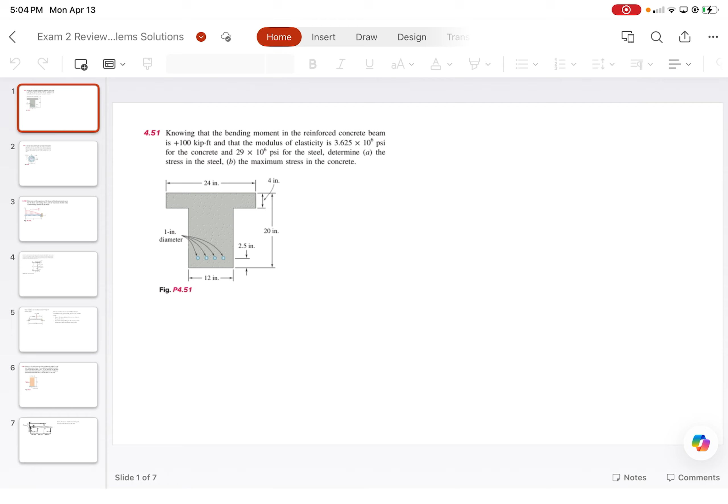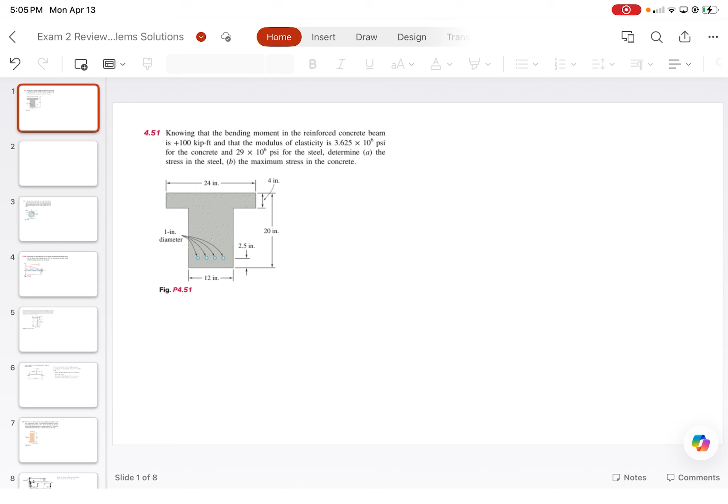All right, so we'll go ahead and jump straight into this problem here, suggested by Travis. We're given that the bending moment in the reinforced concrete beam is 100 kip-feet, and the modulus of elasticity for concrete is around 3,625 KSI and 29,000 KSI for steel. We're asked to determine the stress in the steel and the maximum stress in the concrete.

Let me increase the text here a little bit. I'll give you guys a second to write out this problem. This is basically textbook problem 451 in your Beer textbooks. Not all of the problems in this PowerPoint are from your textbook, I find some of them online from other textbooks, or take them from the COT class, for example, and we're just modifying them.

One thing you'll notice about this concrete problem, unlike every other problem we've covered so far for concrete, is what? It's got the little T shape on the top.

So whenever you see anything like this, there are two possibilities for where the neutral axis can occur: either within the flange, or directly in the web. Because of that, you usually assume first that the neutral axis is located in the flange. We do all of our calculations assuming our depth to neutral axis is C, making the assumption that everything is within that dashed line above first.

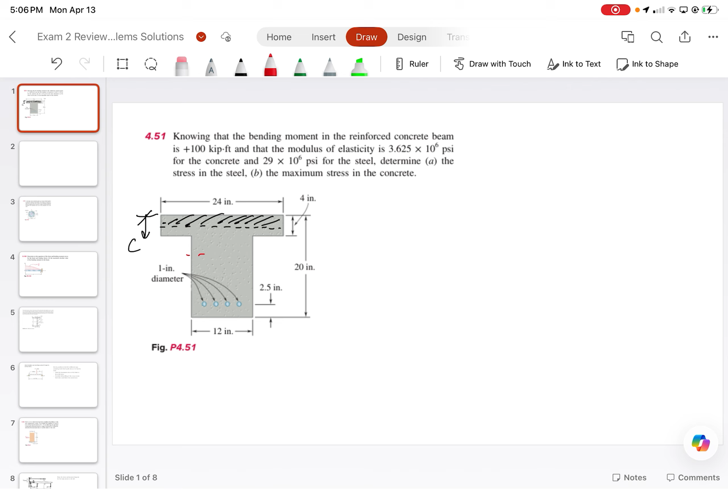If we find that the depth to neutral axis C is within that flange, great, that's our section. But if we get that C is greater than 4 inches, then technically finding C down here is not exactly correct, but it does indicate that it goes below the flange.

Because of that, you need an entirely additional section dedicated to the full flange, and then your C would really be solved from the bottom of that flange, since we know the bottom of the flange is at a fixed point 4 inches below. Does that make sense to everyone?

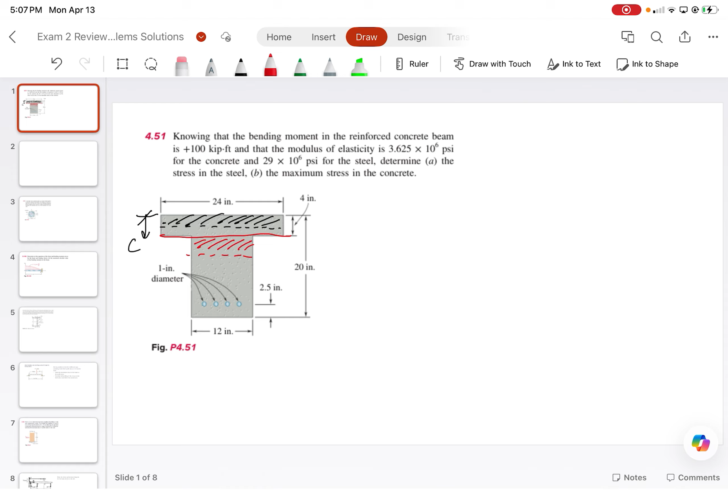I'll go a little bit into it, so hopefully it'll be located below.

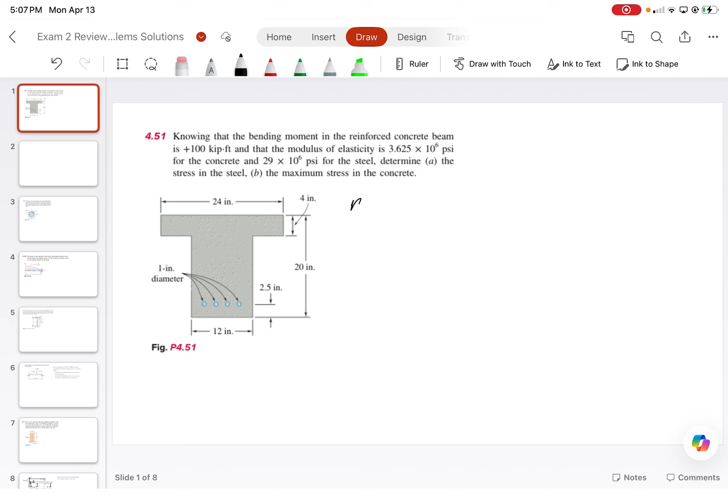So the first step with solving any composite problem is to determine the modular ratio. For concrete problems, it's always ES over EC, so it's 29 over 3.625, which ends up equaling 8, exactly 8, nice.

All right, now the next step with any composite problem is transforming one material to another. In this case, we are referencing steel to concrete, so we're going to transform that steel into an equivalent region of concrete that would yield the same stiffness.

So what we need to do is take all of the steel here, and then multiply it by N. So our NAs term is going to equal the 8 from N multiplied by pi over 4 times a 1 inch diameter squared, which gives us around 2 pi inches squared, or 6.283 inches squared.

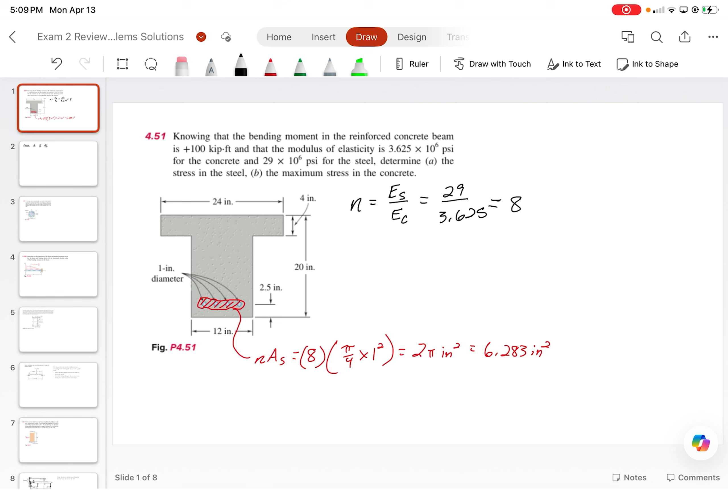In this case, because we don't know where the neutral axis is, there are two things we ultimately need to do. The first would be to assume that all of the compression is occurring within the flange, so we'll have the flange term. We'll have a potential web term because there may be some compression in the web, but we'll ignore the web right now. I'll just write the web and do all the calculations, and if we need the web, I'll do them in red.

So that's a question mark, we don't know if we need that yet. And then we need the bars.

So the area of compression in the flange is equal to what? What is the height that this block is equal to? For concrete, we always take it generally from the side opposite of rebar, so wherever the concrete compression is. This depth of compression is just going to be some unknown variable, we can call it C. So the area under compression is just going to equal 24 inches times C.

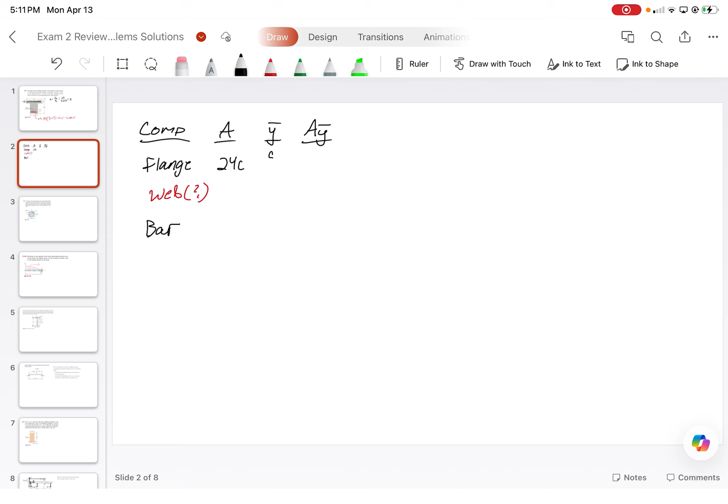Now, Y bar is just going to be the point with respect to a known location. For this problem, I would take our known coordinate point to be directly at the top flange, just so we're not having to do like 20 minus C over 2 — we could just do C over 2. And then AY bar is just going to be the multiplication, so it ends up being 12C squared.

Again, we're not assuming any compression in the web, so just ignore that entirely. For the bars now, we need the A, Y bar, and AY bar.

So the area is that 2 pi that we had previously computed. Its Y bar is the location from the top of the cross-section, which is going to be 20 inches minus 2.5 inches, because the 2.5 is the location to the center of the bars. So 20 minus 2.5 is 17.5 inches, which means that 2 pi times 17.5 gives us 35 pi.

Now we have to add the A's and we have to add the AY bars. So what we end up with is 2 pi plus 24C equals, and then we end up with 12C squared plus 35 pi.

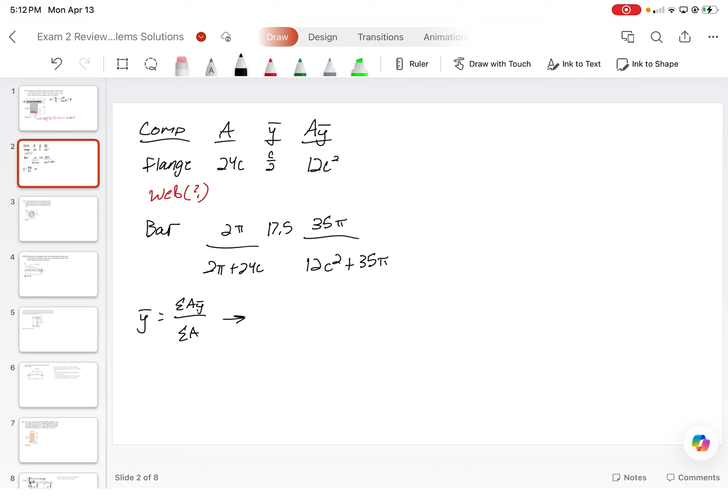Now we should know from the equation Y bar equals the sum of AY bars over the sum of the areas. With the location we're taking with respect to, this gets simplified very quickly because our base value is with respect to C. So by taking it at the top, we can just say that our Y bar value is the location of the neutral axis C, and that equals 12C squared plus 35 pi, all divided by 2 pi plus 24C. Now you can rework this to end up with a quadratic equation.

I am too lazy for that, so I'll be using my Casio calculator to figure out all of that. 35 pi, 2 pi plus... whoops, I did an oopsie, crud... 24x. And what I end up with is a neutral axis depth of around C equals 2.78 inches.

If anybody wants to take a shot at solving that using the quadratic equation, I recommend you do so. Feel free to fact check me on that value.

But assuming that's correct, what does that tell us? Is our assumption about full compression within that flange correct? Yeah. Because of that, there's no compression in the web, which means the web is entirely useless to the calculations — don't get tricked by it. If we had gotten that C was greater than 4 inches, which is the thickness of the flange here, then our flange would have been 24 times 4, and the web would have been the terms as a function of C. We would have had to find what C was with respect to the bottom flange, and that would have helped us determine the neutral axis location from there. So we would have gotten an entirely different equation at that point.

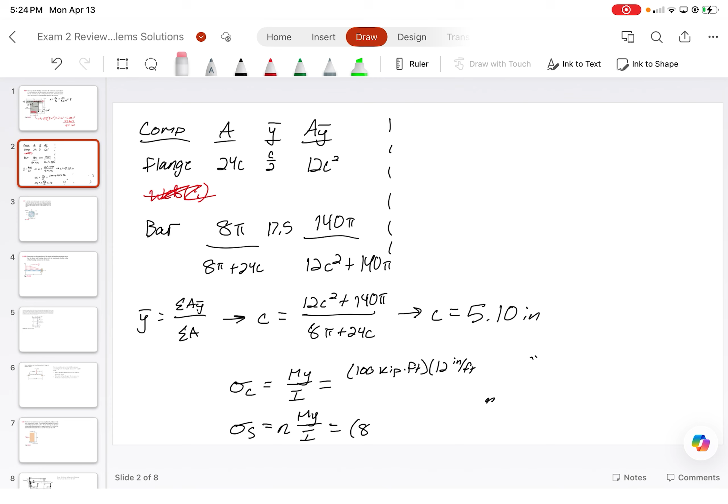With that in mind, we now need to see what we need to do, so we've got to reevaluate everything. Let me erase all of this. Sorry about that. So that's greater than 4, so no good.

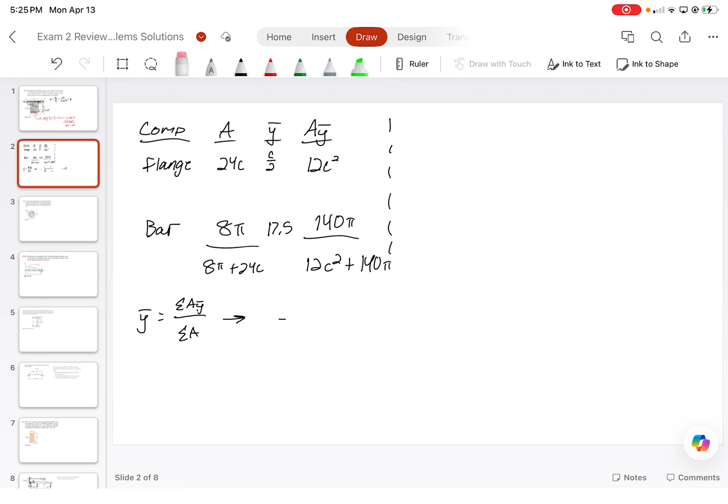So let's head back over to the work I had written previously. That is going to end up being 24 times the 4 inches, so the full width of the flange times the full depth of the flange, so 24 times 4 is going to be 96.

This is going to end up being 4 inches plus C over 2, right? And this is all basically now treating it as this. So that is the full compression block, and this is that. I want to basically solve everything where this is C, the location of the neutral axis.

So the center of this is just going to be 4 plus C divided by 2 from the top flange. So 96 times 4 is 384, plus 96 divided by 2 is 48C. The web is going to be -- nope, sorry, I'm trying to rush through this and I should not be.

The center of this from the top is 2 inches. So please ignore that. 2 inches, 96 times 2 is 192. The web is going to have a neutral axis of 4 plus C over 2. The area is going to be 12C.

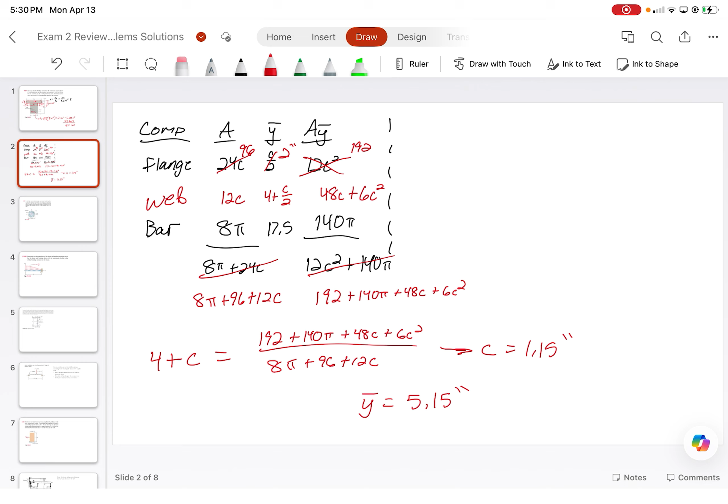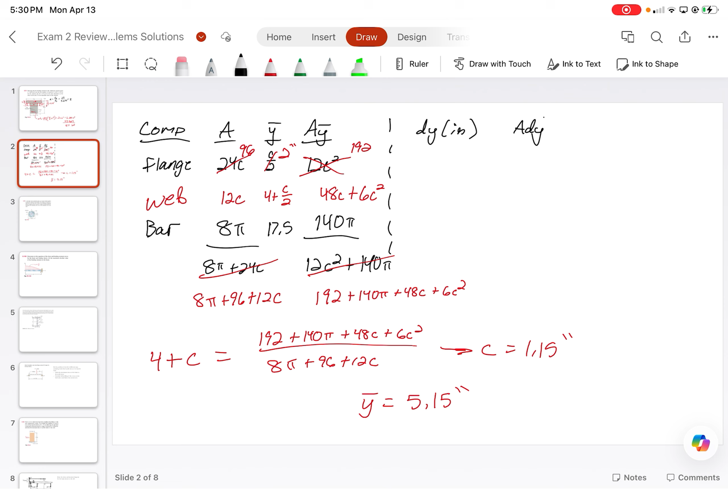I'm not going to repeat the process of doing the My over I -- it's the same exact process at that point. The only thing is just finding the second moment of area of inertia. I could do that real quick. So now we have to do dy in terms of inches, A dy squared in terms of inches to the fourth, and then Ix in terms of inches to the fourth.

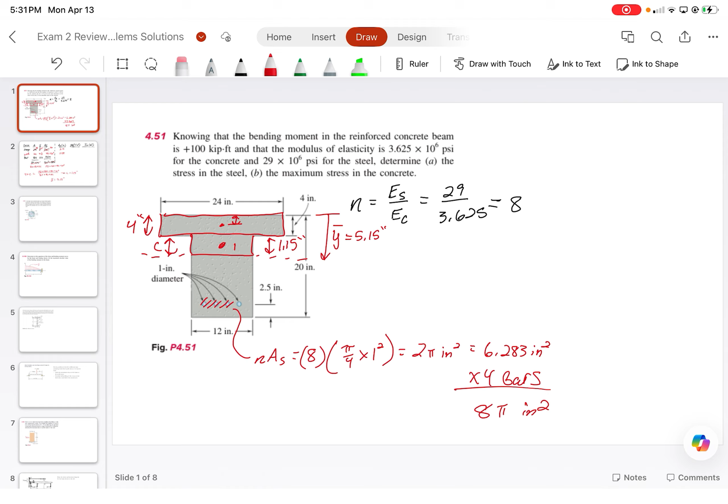So for the flange, it's just going to be 2 inches. So 5.15 minus 2, that would make this 3.15 inches away. For the web, it's just going to be C divided by 2, so that's 1.15 divided by 2, which gives us 0.58 inches. That's this dimension here, this one right there.

And then for the bars, it's just going to be whatever this dimension is. So that would be 20 minus 5.15 minus 2.5, which gives us 12.35.

Multiply A times dy squared: 96 times 3.15 squared, oops, this gives us 952.56. 12 times 1.15 times 0.58 squared gives us 4.64, and then 8 pi times 12.35 squared gives us 3833.31. So yeah, it's a big difference in the second moment of area of inertias.

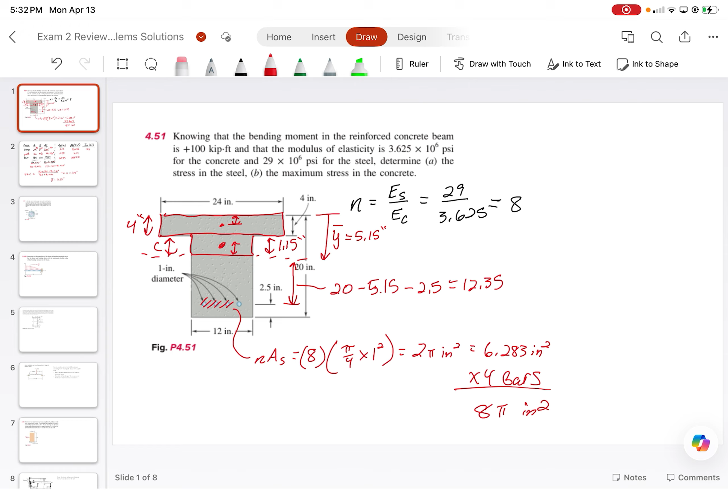The Ix of each term is just going to be 12 times 4 cubed divided by 12, so 4 cubed gives us 64 here. For the web, it's going to be -- 128, my bad, because it's a 24-inch width, not 12-inch. This one is going to be the 12-inch width, so it's going to be 12C cubed divided by 12, so it's going to be 1.15 cubed, so this is around 1.52. And then for the bars, just assume it's approximately 0. And then your Ix total is just going to be the sum of everything.

So we should get around 4,920.03, and that is the corrected second moment of area of inertia. Hopefully everyone can figure out the stress part from there, because then it's just as simple as figuring out what y is in your equation. We know what M is, we know what I is. Y is just the positional coordinate of compression from the neutral axis, which would be 5.15. And for the steel, you would use 12.35.

All right, that one took about 30 minutes with the problem, so I guess I'm kind of glad I took that one off, because even I made a mistake on it. I got tricked by it.

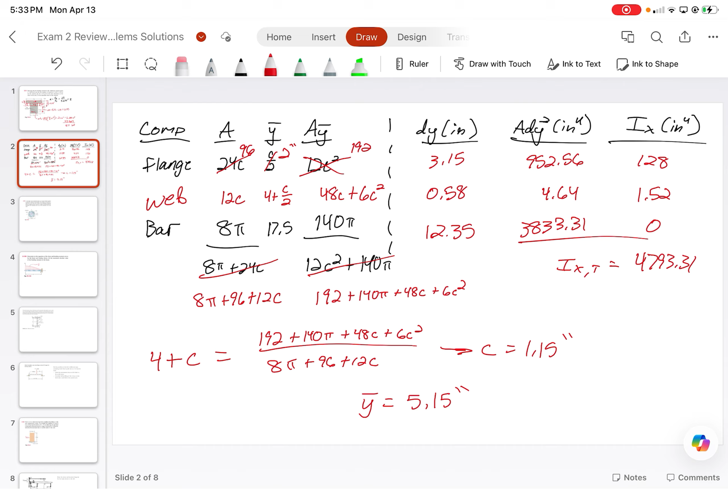All right, so problem 2 now. I'm going to skip that one. I'm kidding, Brianna, that would have been mean.

All right, so now for this one, we're basically given a steel pipe and an aluminum pipe, and they're bonded together. This is basically going to be a composite beam that is subjected to some type of bending stress. So what we're asked to do is find the maximum stress in both the aluminum and the steel. All right, so the first step with any composite problem is we want to determine the modular ratio between the two materials.

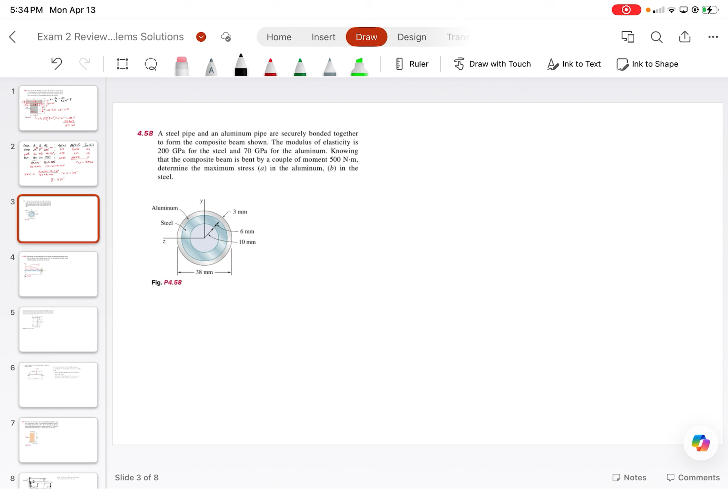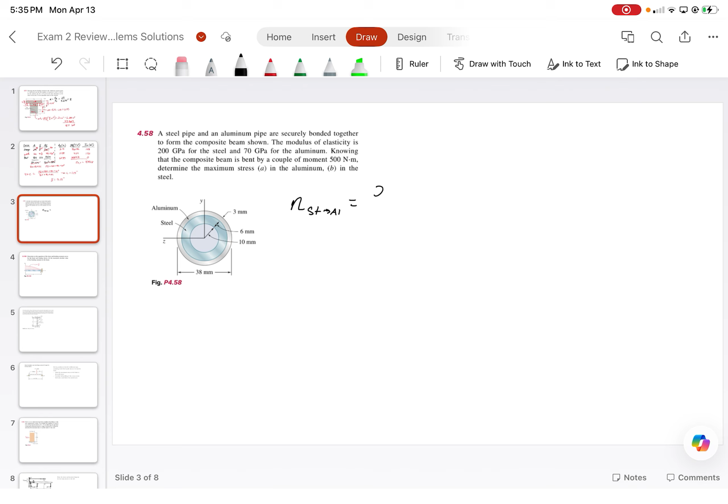So in this case, I want to transform the steel to aluminum, just because the steel is going to be stronger. So by transforming the steel to aluminum, it's going to be equal to 200 gigapascals divided by 70, which gives us

2.86. Now, the nice thing about this problem, we don't need to find the neutral axis. Why? It's symmetric. We know where the neutral axis is. So we know that the total Ix term is just going to be the summation of the individual Ix's.

All right, so let's get the Ix for the aluminum, and that is basically going to equal pi over 4. I should note that the I for a circle is equal to pi over 4 r to the 4th.

For the aluminum, it's kind of like a pipe on the outside, so we got to do outside minus inside. So that's going to be 10 plus 6 plus 3, that's 19 to the 4th, minus 16 to the 4th. This is going to yield massive numbers: 50,882 millimeters to the 4th.

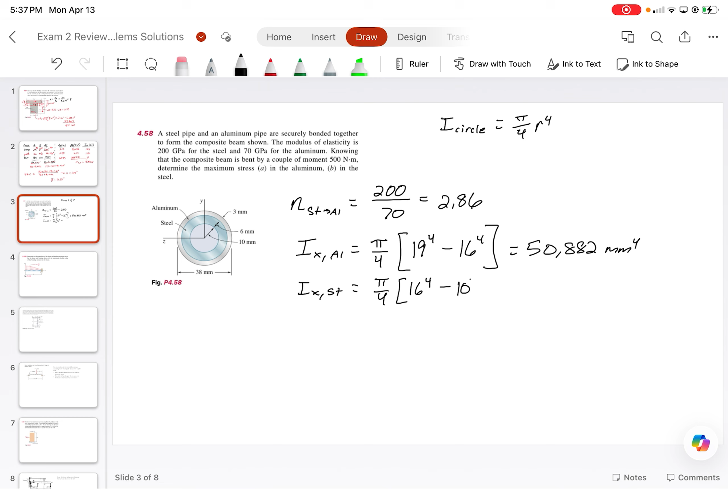And then Ix for the steel is just going to be pi over 4 times 16 to the 4th minus 10 to the 4th. Reason being is because all of this space here, I know it's a little hard to see, is all void space. So that interior section of this entire cross section is just void.

All right, now this is the second moment of area of inertia of steel. But what's our reference material? Aluminum. So we got to multiply this entire thing by 2.86, so that way we get it in terms of equivalent aluminum.

So pi over 4 times 16 to the 4th minus 10 to the 4th, times 200 divided by 70, and I get that this is around 124,622.5 millimeters to the 4th.

Now, Ix total in terms of aluminum equivalent, so the total second moment of area of inertia for the aluminum equivalent would just be the summation of the two, which we get 175,504.5 millimeters to the 4th.

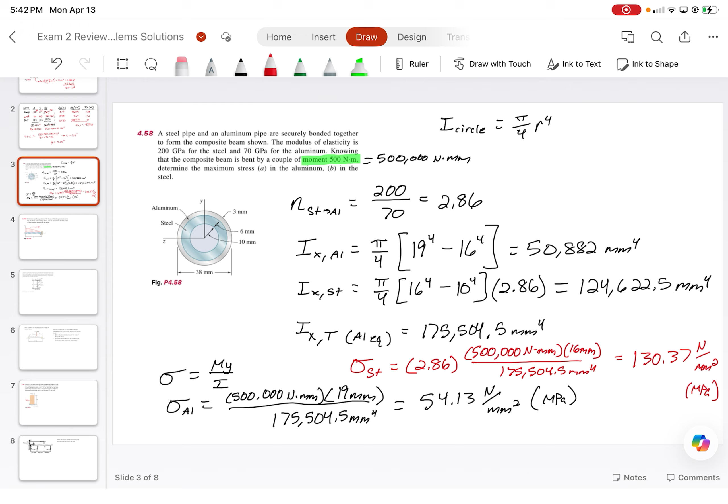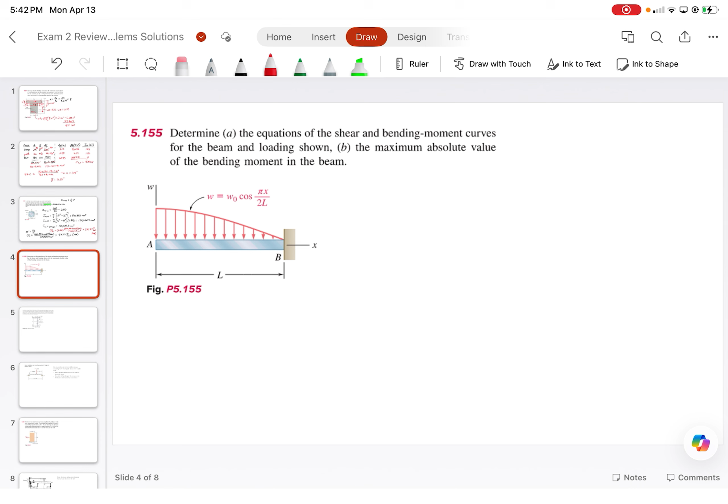Next question, a nice calculus question. So with this, we are asked with determining the equations for shear and bending and also finding the maximum absolute value for the bending moment in the beam. One thing you guys will notice is you are given a distributed load in terms of a cosine function, which makes it nice and fun.

So, some things that we need to remember. What is the derivative or antiderivative of cosine? Yep, so hopefully you guys are aware of that. I know I always struggled with that, but I've gotten kind of used to it by now.

All right, so the first thing that we need to know is how do we determine what the shear force is ultimately going to be? To simplify things, we can set our x-coordinate equal to this, because that is really how this diagram is defined. So our x-coordinate is assumed to go from A to B. That should really be defined in the problem. It doesn't, though. All right, so that helps us.

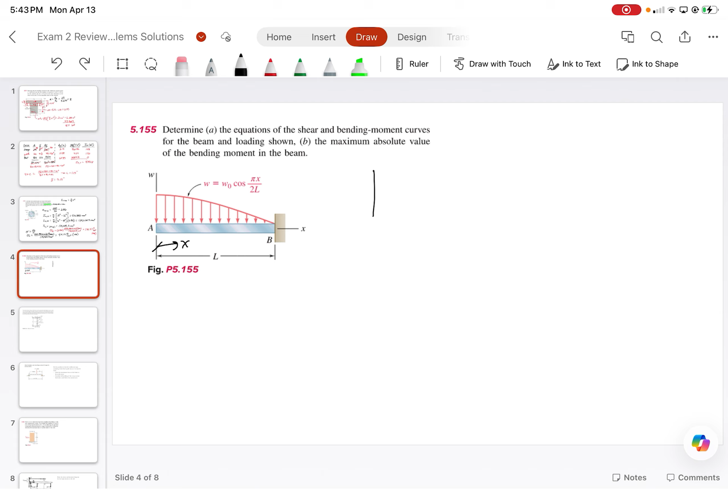That means that when we cut a section and we analyze, let me draw it out a little better. We've got our function w equal to w naught cosine of pi x over 2L times x. Our shear force we'll assume is that, and our bending moment we'll assume is that. This is going to be m of x and v of x.

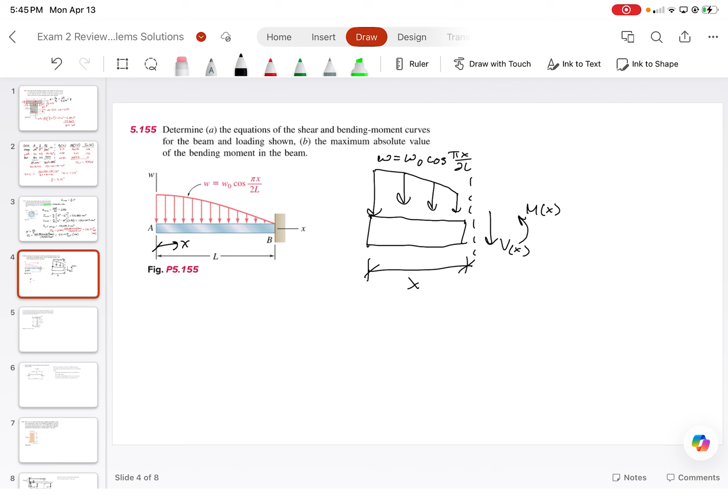Now, there are a few ways you could do this. Obviously, we're going to need to do some variation of integration. So we should note, if you guys look back previously in your slides, the relationship for how shear force is defined when you're given a distributed load as a function. If we do the sum of the forces in the y direction and set that equal to 0, we are left with negative v of x minus w naught cosine pi x over 2L, which means our shear force is equal to negative w naught cosine of pi x divided by 2L times whatever that... it's not exactly this, let me rephrase. It's the area under that curve. Does that make sense? We need the total area under the curve, so that was kind of a wrong thing to say.

So Vx is just going to equal negative w naught times the integral of cosine of pi x over 2L dx. All right.

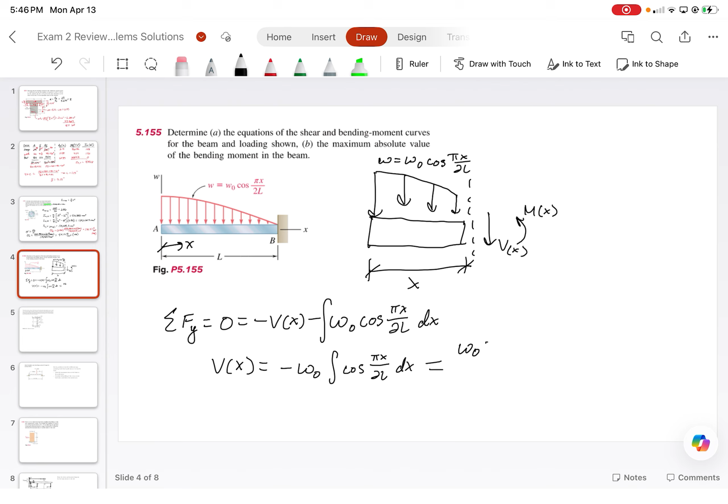What is this equal to? Who here remembers their cosine integrations? Is it w naught 2L over pi x times sine, and then it's positive? The x doesn't get factored out, just the coefficient. Oh yeah, yes, yes, so you're right. So that integration ends up equaling w naught 2L divided by pi, sine of pi x over 2L. Now this is an indefinite integral, so similar to what you've seen with chapter 9, you have the horrendous nightmare of plus C1.

All right, but there's a nice thing about this. Remember when we were introducing the relationship between bending moment and shear force? How do we determine the bending moment? What was that equal to? The integral of the shear force. Exactly. So we could determine m of x through integrating the shear force diagram.

All right, so the integral of w naught 2L over pi, well that whole thing can just get dragged out, times the sine of pi x over 2L plus C1, and that whole thing gets integrated by dx. Now, what does this yield us? And don't worry, I know C1 is probably freaking some of you out right now. But again, similar to when we were dealing with the deflections and those coefficients were dependent on the boundary conditions, this too is going to be dependent on the boundary conditions. Instead of it being compatibility with deformations, it's compatibility with forces though. Does that make sense? You guys will kind of see where we're getting at. All right, so bending moment diagram, what do we end up getting for that bending moment?

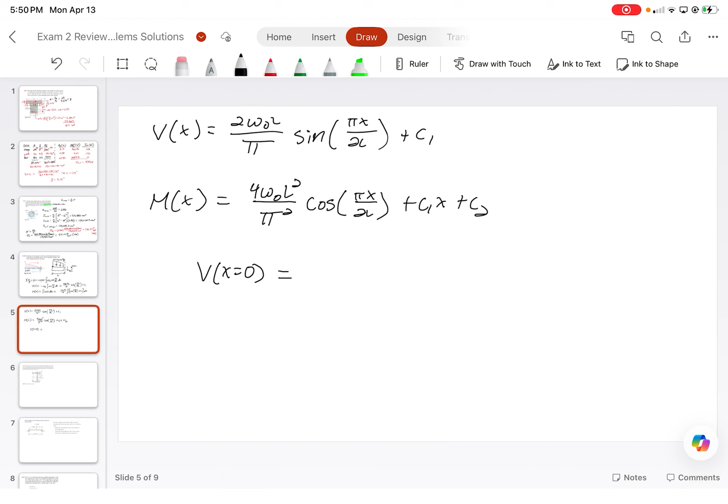And we know that that is just going to equal 2W naught L over pi sine of 0 plus C1. And we know that shear force has to equal 0 at that location. Sine of 0, guess what, is 0, which means that we end up with our first coefficient equal to 0.

Now the bending, yes? Two questions. Should it be negative cosine or is it positive? It is negative cosine, but if you look at our equilibrium equation, our shear force was equal to negative cosine already, so the negatives cancel out. Okay, another question. Should there be like an AY component, like a force? No, the reason being is because it's a free end at A and it's fixed at B. So if there was a vertical reaction force at A, it would be statically indeterminate.

All right, any other questions? Awesome. All right, continuing, we know that the bending moment at the free end has to equal 0 also. So 4W naught L squared over pi squared cosine of pi x over 2L, but x is equal to 0, plus C1 times, C1 is just 0, x is just going to be 0, so plus C2, which gives us, well, this has to equal 0. So what we get is that C2 is going to equal negative 4W naught L squared over pi squared, because the cosine of 0 is just 1.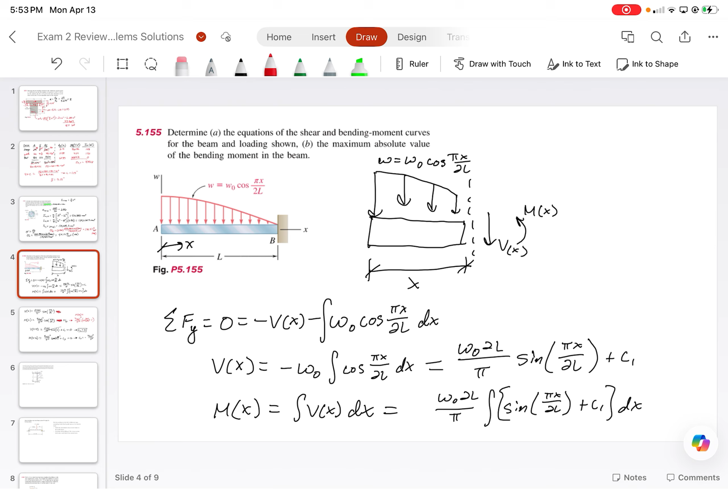All right, now what did the question ask us? That was the part A equation. Now we need part B: the maximum absolute value of the bending moment in the beam. Well, what's going to be the maximum location at which max bending can occur? It's whenever that cosine term is just going to be 0, right? So we need to know when the cosine term is going to equal 0.

So basically M max, the absolute value of that is just going to be 4W naught L squared over pi squared, because cosine of pi x over 2L is going to have to equal 0. Now we can figure out where that is. Cosine of pi x over 2L is equal to 0. So where would that be? What is it? Cosine... I'm actually curious. Cosine... That would just be at x is equal to, I don't even know. Whatever.

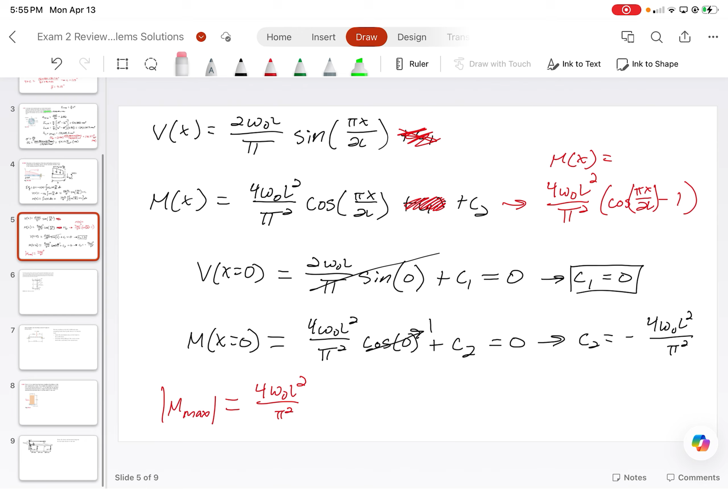Either way, that would be the maximum bending moment that the beam would undergo. Any questions about this problem? No? All right, now we've got a few other options for questions.

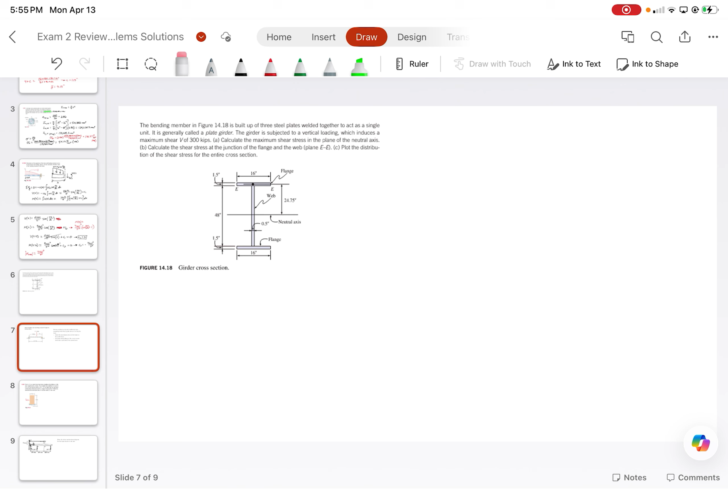This one is calculating the maximum shear stress. I think that one's kind of a simple one. I think I want to do this one next. That's just a composite that's not concrete. And then this one is just drawing the shear and moment diagrams. Yeah, so I think this one is the one that I want to do.

All right, so we're asked here to determine the lightest W shape for the beam shown. We're supposed to solve it two different ways. The first way is just assuming that the maximum stress is limited to the yield stress. And then the second option is assuming that full yielding of the cross-section occurs. Now, what is the difference between both of these?

If we limit the maximum stress within the beam to be limited to the yield stress, how does that stress distribution look? I'm going to let everyone else figure it out.

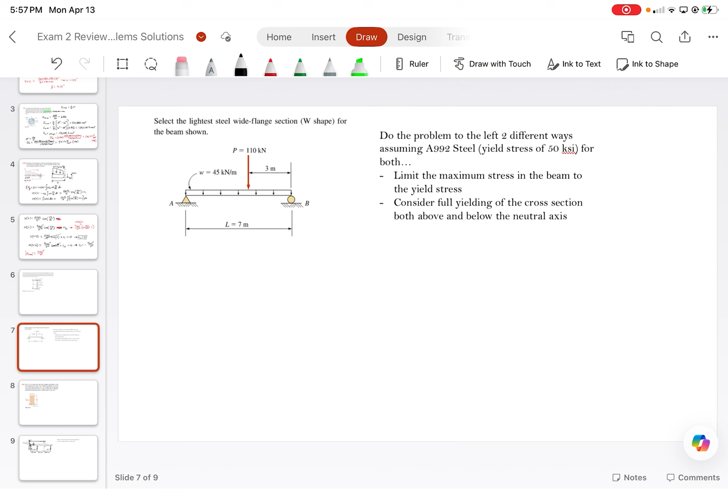Think back to your homeworks. I gave you guys a certain problem with this that I think only one student actually answered fully, because it was the bonus question. Where's the maximum stress occur in a beam? Let me ask that.

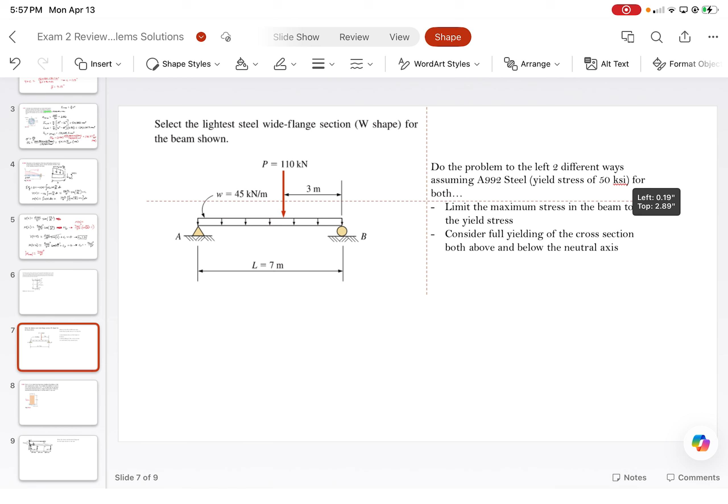Where would the maximum stress occur in the beam, assuming linear elasticity? It would be at the point that you're pressing down. Not quite.

Looking at it from like a W-shaped cross-section. All right, so we know that it's a W shape. I'll draw a quick sketch here. If this is the cross-section here, that's the neutral axis. Where's the maximum stress occur? At the extreme fibers, all right? So it occurs at y bar, all right?

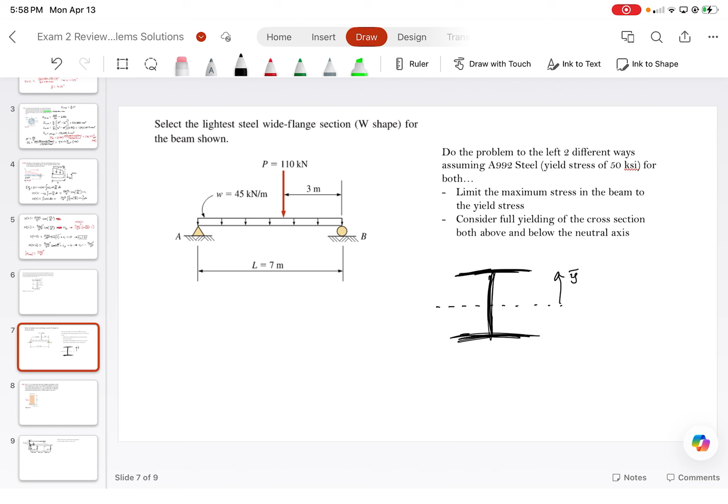What would the stress equation be for that? M y bar over I, or simply put, M over S. All right, so let's do that real quick. First, we need to know what the maximum bending stress in the beam would be.

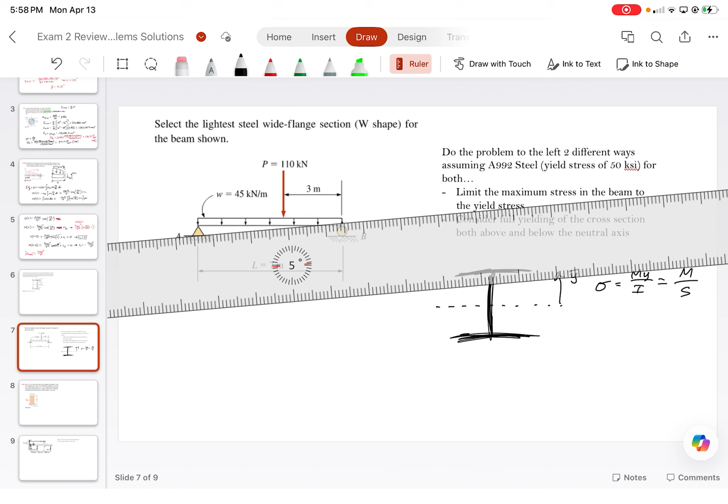All right, so we can draw out a quick moment diagram, which would require us to find the vertical reactions first. This would be 45 times 7 divided by 2, that would be 157.5 from the distributed load, plus 110 times 3 over 7. I get a vertical reaction force of 204.64 kilonewtons. Somebody fact check me on that.

And then this one would be 220.36 kilonewtons. Somebody please confirm that reaction. I really want to make sure that it's right. I do not want the same issue as earlier today.

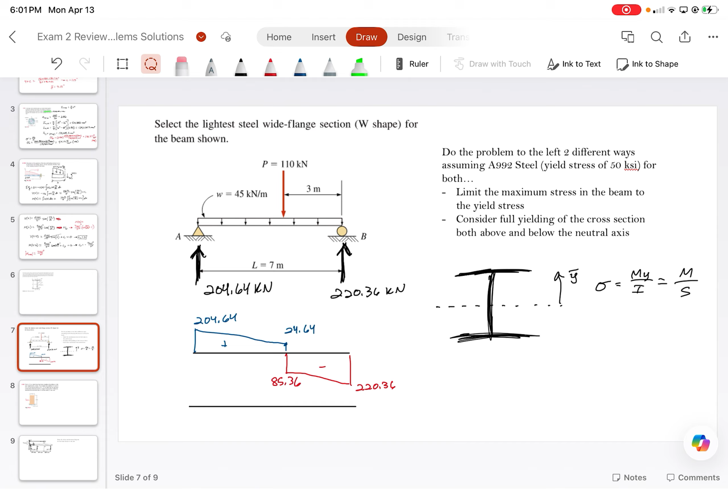Reactions, everyone get them? They match? Awesome. Now, when you draw out the shear force diagram, it should look like that.

All right, you follow up, tip to tail. So you go up 204.64, you add up to the next point, so the next discrepancy is at the point load. So you get 204.64 minus 45 times 7 minus 3, is going to be 4 meters, which gives you 24.64.

All right, from there, you subtract the point load, so you drop down 110, which brings you to negative 85.36. Then you subtract 45 times 3, and that brings you to negative 220.36, which should align with your vertical reaction force on the opposite end.

All right, questions about this? No? How do we determine the max bending moment now? Find the area under the positive side up until the point load. We know that the maximum bending moment in this case is going to occur where the point load is located, primarily because the shear force diagram crosses zero at that location. Wherever the shear force crosses zero is a point of maximum bending. In this case, there's only one, which occurs directly at the point load.

Oops. Oh. Why did I put... oh yeah, exam 2 review.

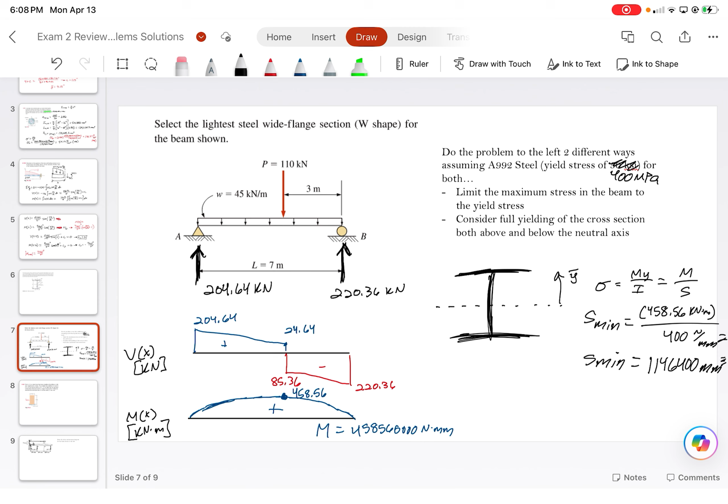So this is around 400 megapascals. That would give us, let's see, 458 kilonewton meters, which is around 458560000 Newton millimeters, divided by 400 newtons per millimeters squared. So S min would just equal... okay, that seems reasonable, 1146400 cubic meters, or cubic millimeters.

All right, and then you would just go to a steel table, I think. This here actually has some decent values. Okay, yeah, these sizes are reasonable then. I'm not even going to decide a shape because it's good enough for what we needed it for.

All right, now plastic section modulus is what we need to determine the required section shape considering full yielding. How does this change anything? What do you guys think?

Well, simply put, Z-min would just be the same as S-min, which, when you guys leave the class, I recommend you take a look here. You'll find that the plastic section moduli for standard steel shapes is generally larger. So because of that, you'd use the same section modulus you'd need and just look at the Z table, and you'd find you can use a smaller size shape. Does that make sense? So you'd just replace the Z with the S, and then when you go to a design table like this, you can actually just look up directly.

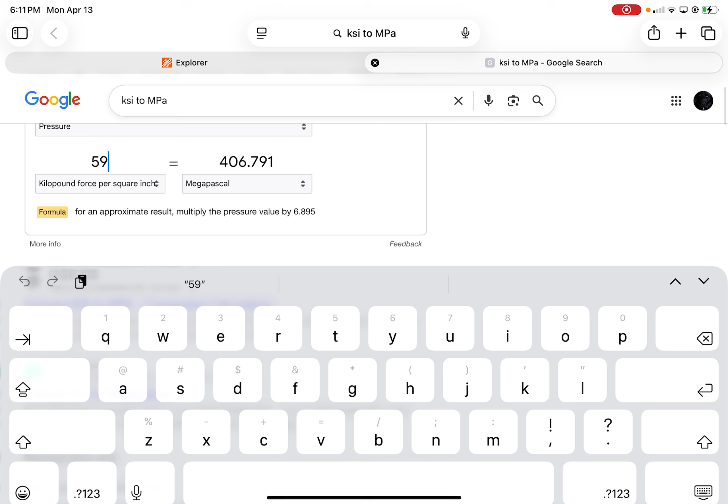And I don't have plastic section moduli on here. Here, let's see, W460 by 74. Yeah, you can see, so the plastic section modulus is actually somewhat larger. So because of that, you can go with a shape with a plastic section modulus to get closer down to the value, which would allow you to more optimally design certain steel structures, if that makes sense. Yeah, I thought this table had the plastic section modulus. I was really hoping it did, but it does not, unfortunately.

All right. So this would just end up with a shape.

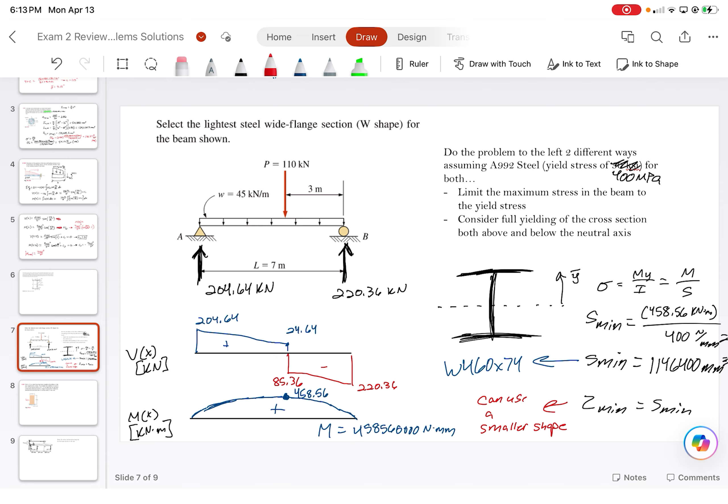Any other questions? Does anyone want to continue working on other problems? I guess give this problem a shot, just real quick. Try and see if you can draw the shear and moment diagrams for this. I know it's a little bit of a sketchy image, no pun intended, but...

What number is at the end there? At the, what, what are the two? Oh, those are both forces? 300 Newton forces, okay. I know the image sucks, this I got from a textbook solutions manual from like 1964.

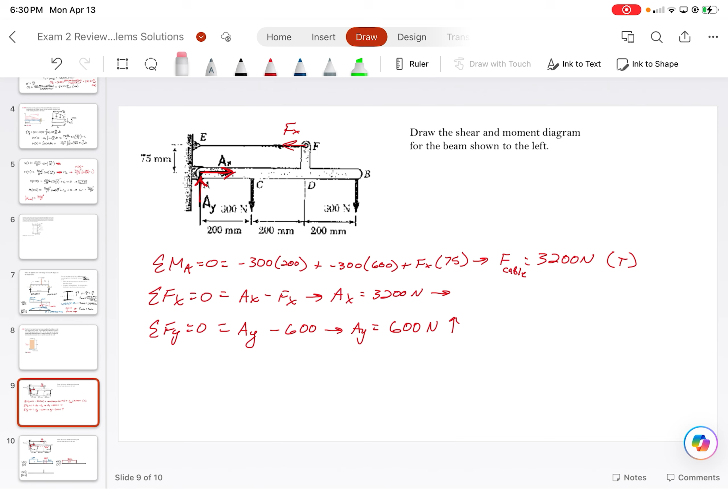Reaction forces? What's the force in the cable? Oh, you're asking for the number? For the force in the cable, yeah. 2,400. I got 3,200. How'd you get 2,400?

From the moment equation, moment at A: negative 300 times 0.2 meters plus negative 300 times 0.4 meters plus... should be 0.6 meters, because that load is 600 millimeters away from A, not 400. So that force should be 3,200 newtons, giving the cable 3,200 newtons in tension.

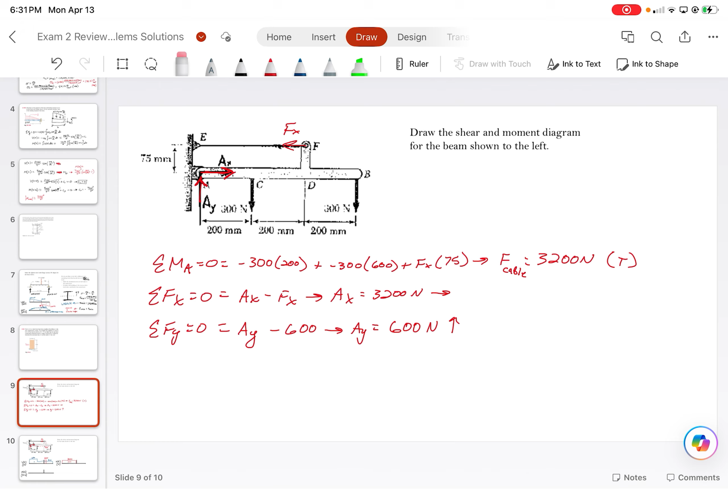From there, you should sum the forces in X. You'd find that AX is 3,200 newtons moving to the right, and AY should be 600 newtons moving vertically upwards. Everyone got that? Awesome. Now for the shear and moment diagrams, they should look somewhat like this.

I'm still trying to fully figure out the moment diagram. Oh yes, I think that's where I went wrong. Okay, yeah, for the moment diagram.

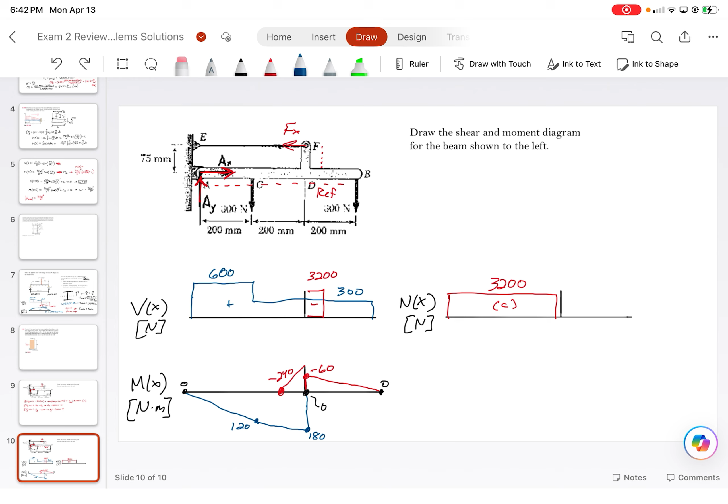Let's do another problem, unless you guys are getting sick of me.

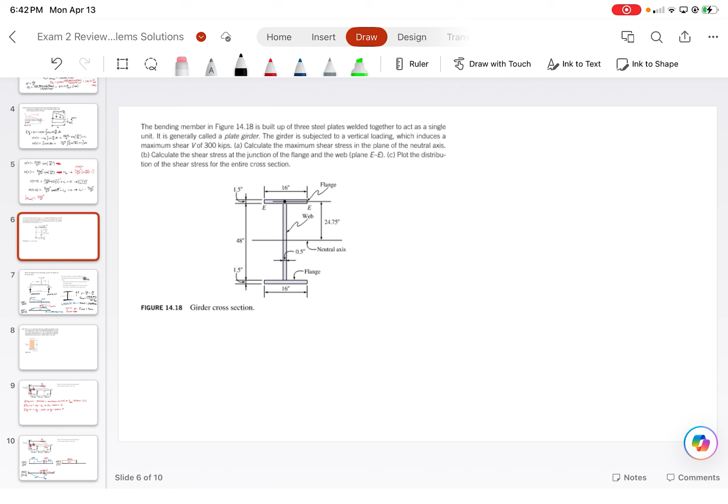All right, so for this problem, the bending member in figure 14.18 is built up of 3 steel plates welded together to act as a single unit, generally called a plate girder. It's very common in bridges. It's subjected to a vertical loading of 300 kips. We're asked to calculate the maximum stress in the plane of the neutral axis, and then calculate the shear stress at the junction of the flange and the web.

And then it asks to plot the distribution of the shear stress for the entire cross section, which I think I'm just gonna skip. I don't know yet, I guess we'll see. But I think ending at 7 o'clock should be fine, because I think we all kind of want to go home.

But yeah, if you guys have a good one.

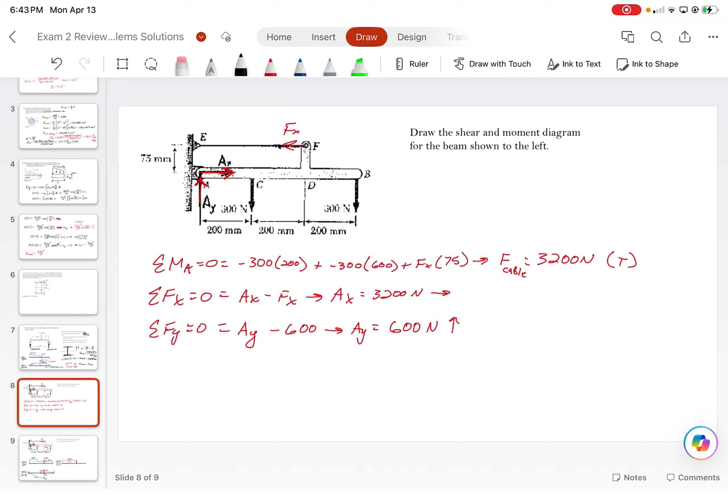All right, so we'll give this problem the last one. I'll actually cut that one, but it is in your textbook. So this one is not in your textbook, which is why I'm going over it.

All right, so for this one, we first need to know the neutral axis. They actually give us where the neutral axis is located and where the centroid of the flanges are, which is nice and convenient. So to first find the maximum stress at the neutral axis, we first need to know, for part A, Q and Y bar, which is equal to A tilde times Y tilde. Now, A tilde is the total area of the flange and the web above or below the neutral axis.

All right, so that A tilde is just going to equal... let's see. So we could break it up into 2 components. We've got 1 and then 2, the flange and the web. Let's see, I'll actually make a table: Part, flange, web, A tilde, Y tilde, and then Q is just the multiplication of the 2.

So for the flange, the A tilde is just going to be 1.5 times 16, which gives us 24. The location of the flange from the neutral axis given to us is 24.75. For the web, it is going to be 48 divided by 2, which is again 24, times 0.5, so that's going to be 12. And then Y tilde is just going to be 48 divided by 4, which is just 12. So doing some multiplication, this becomes 594, 144, which means that the total Q is just equal to 738 inches cubed.

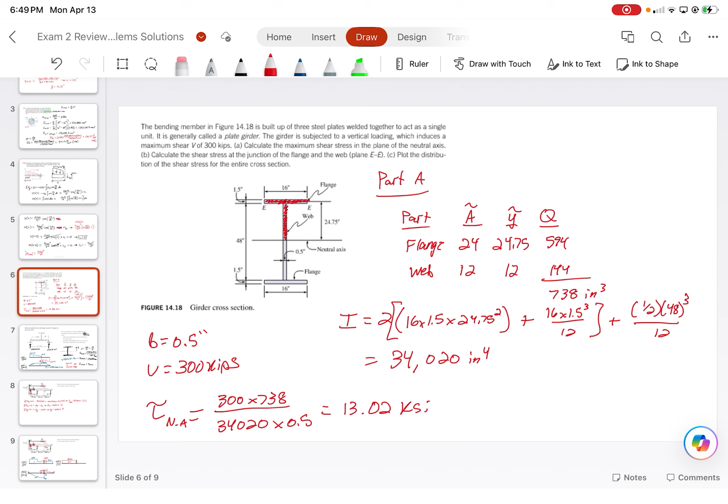So that's the stress at the neutral axis. What about the stress at the junction of the flange and the web? Let me copy paste this to another slide, erase all of this in red, and then I'll do it in blue or something.

So at the junction of the flange and the web, it's basically just analyzing it at that location. This is part B, and it's just going to simply be the flange this time. There's no web. We're going to have an A tilde, Y tilde, and then a Q.

So our A tilde becomes 16 times 1.5, which is again just 24. Y tilde is going to be 24.75. So our Q just becomes 594, now excluding anything from the web.

Now what we're going to have is two values of B: a B1 and a B2. B1 is going to be the width of the flange, which is 16 inches. B2 is going to be the thickness of the web, which is 0.5 inches. The reason for that is because at the junction there's an immediate jump from when we go from the web to the flange, which is where we get that weird kind of jump in the profile. I is just for the entire cross section, which we previously calculated as 34,020 inches to the fourth.

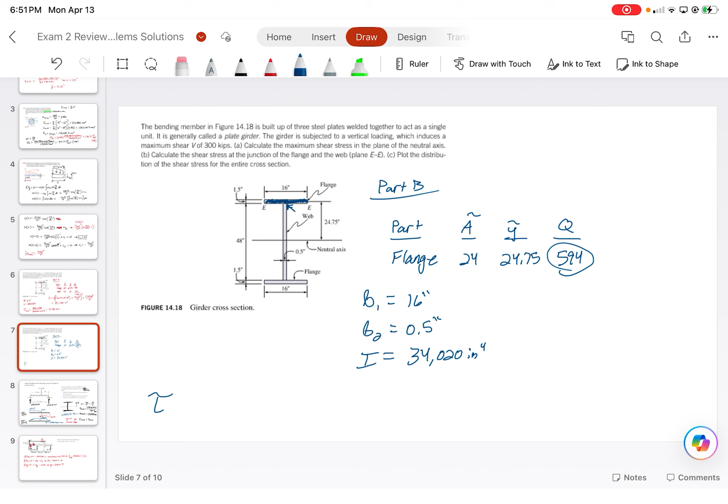So tau at, I'll call it E, because that's the location of the junction, is equal to 300 kips times 594 inches cubed divided by 34,020 inches to the fourth. Just to signify whether it's the shear stress for 1 or 2, I'll circle this one, multiply it by 16 inches.

Which gives us a shear stress of around 0.33 KSI in the flange. And then tau E2 would just be the same thing, but instead of using 16, use half an inch, which should give us 10.48 KSI.

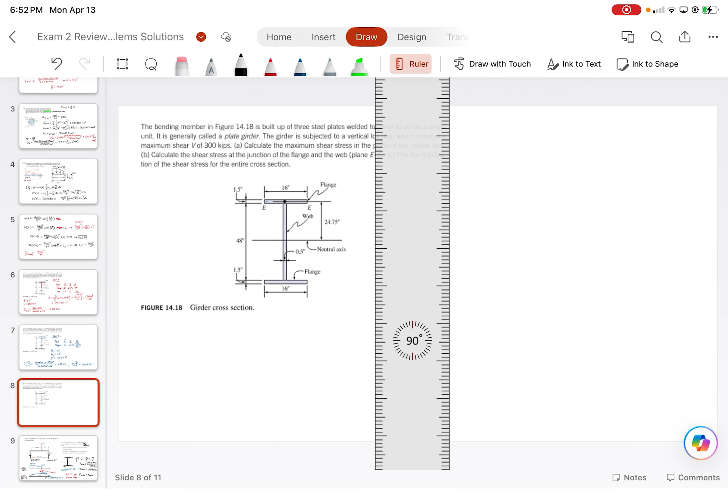The last part of this problem is what would the stress distribution basically look like. We can roughly hand it since we don't know the exact values. So if I draw a little diagram along the height, we know the shear stress is 0 at the top and bottom, the very edges of the beam. So it starts out 0 and 0. We know going down 1.5 inches, it maxes out to about 0.33 KSI for both.

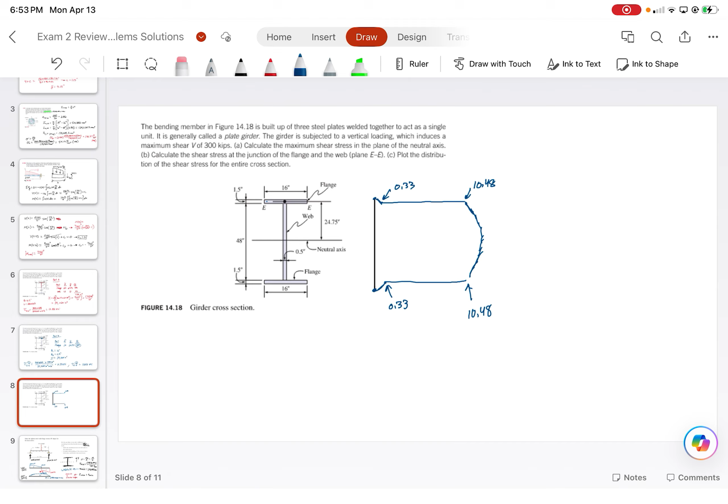And then from there, there's an immediate jump to around 10.48. So that's around 0.33, 0.33. This becomes 10.48, 10.48. And then the shear stress distribution is always quadratic in nature, where the maximum shear stress just becomes 13.02. This is the shear stress at the neutral axis.

Any questions about this? How you guys feeling about the exam? I'm sure you guys will do fine. Just prepare that formula sheet and try to get familiar with it. Maybe try doing some problems with just the formula sheet. Any other questions?

Brian asked: for shear stress about the neutral axis, for some shapes, it's not like the max isn't at the neutral axis—is that when there's not a line of symmetry? Yeah, because you'll notice for the triangle problem on the latest homework, it's height over 6 above, instead of height over 2 for symmetric axes. So it's slightly skewed wherever the maximum shear stress is. For asymmetric shapes, the maximum shear stress isn't always at the neutral axis.